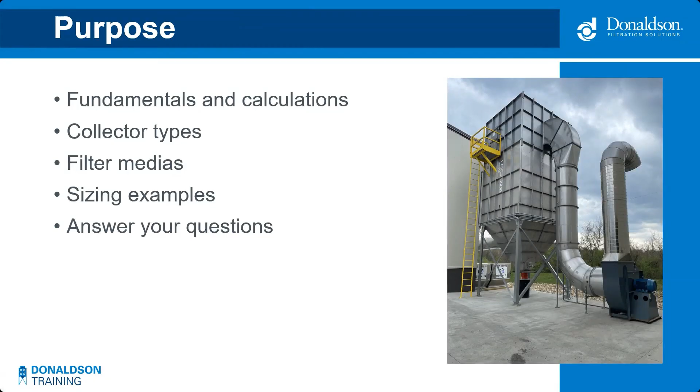We're going to start off today's webinar discussing the basics of dust collection, including fundamentals and calculations that pertain to collectors. Then we'll get into different types of collectors, filter medias, including the criteria and some sizing examples. And then we'll finish up at the end with everyone's favorite part, the Q&A session.

So let's start with the basics for those of you who are new to dust collection system design. I want to start off with why dust, fume, and mist control is important. There are a lot of reasons to control dust, fume, and mist, including safety concerns and hazards, improving air quality for workers, exposure control. We want to reduce potential dust in the breathing zones of the workers operating the process. Environmental concerns, we want to meet EPA standards for environmental air quality and outlet emissions regulations. And lastly, cleanliness. We want to address concerns about the overall cleanliness of the facility. At the end of the day, it's about sending workers home safe to their families.

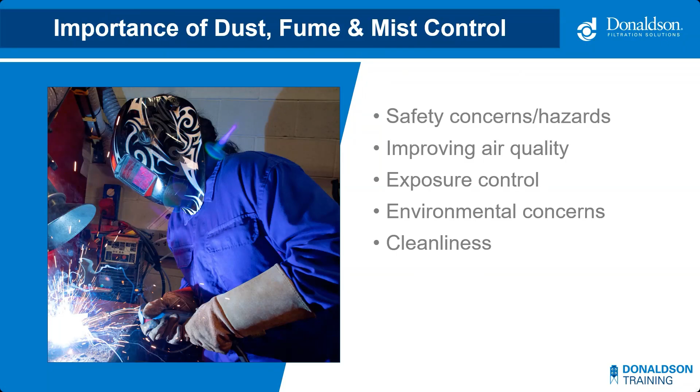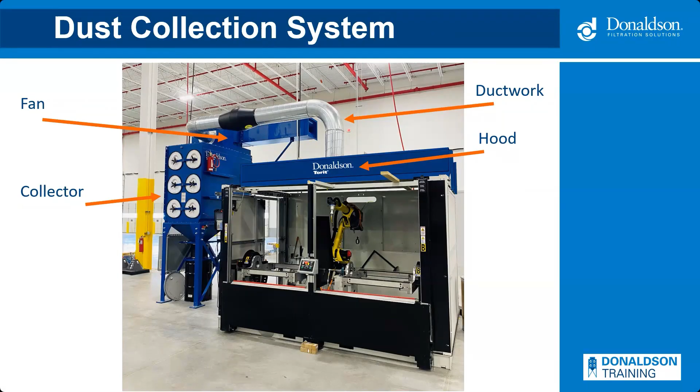Your typical four major components to a dust collector system are the hood, ductwork, collector, and fan. If one component in a dust collection system is poorly designed, the whole system is affected. So when experts like Nate design a system, there are a lot of factors that are taken into consideration.

I'll let him walk you through them.

Yeah, thanks, Alex. Here are just a few things we would consider. Of course, the material being collected is probably number one. We would certainly look at total airflow requirements. Are we looking at ambient versus source? Do you have any future expansion? These are just a few of the application details we would look at, leading into the applications engineering team as we look at particulars for each of your projects.

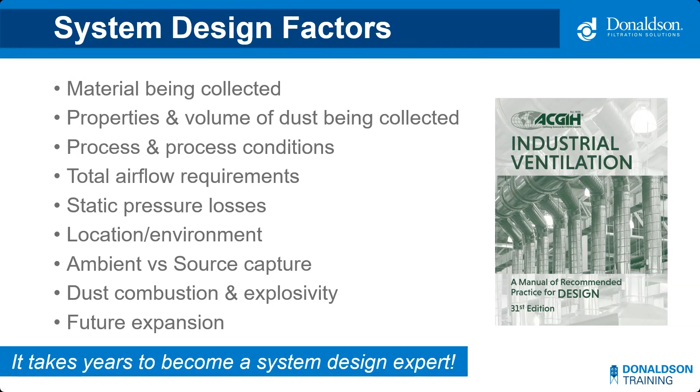Thanks, Nate. When we think about collecting dust, fume, or mist contaminants, there are some important characteristics to consider, which help us determine the type of collector and filter media. In terms of size, some contaminant is visible to the naked eye, while other types are only visible using a scanning electron microscope. On the larger side are contaminants such as cement dust, fertilizer, coal dust, and milled flour. On the submicronic side are contaminants such as weld fume and carbon black. The size of the dust is important because it dictates how the dust cake will form on the filters in the collector.

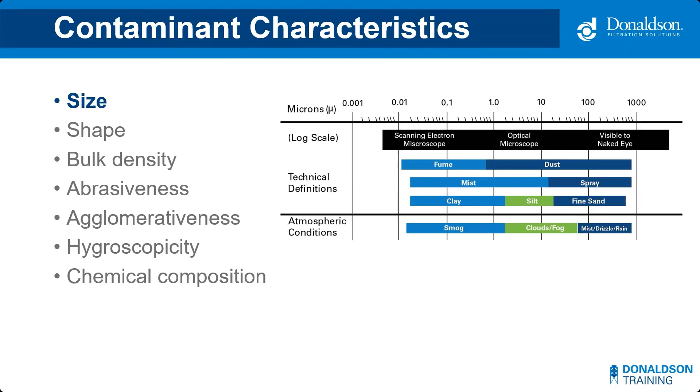Moving on to shape. The shape of the contaminant could be spherical or round, fibrous - think long and skinny like shredded paper - flaking or flat, or even a mixture of different shapes depending on the application generating that dust. The photo shows fibrous particles from a fiberglass sanding and grinding operation. In this situation, you would probably need to specify a particular type of filter media and potentially a specialized baghouse to keep the dust from bridging over the outlet and between the filters.

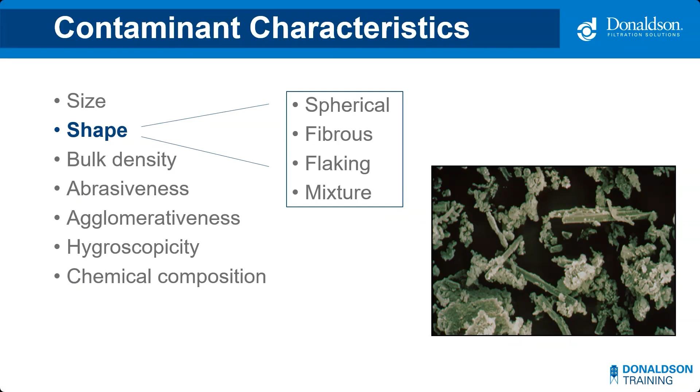Next, we have bulk density. Bulk density is the amount of weight measured in a defined volume. It is expressed in mass per unit volume, typically pounds per cubic foot or kilograms per cubic meter. An example of a lighter dust is oats at 26 pounds per cubic foot, and on the heavier side is lead carbonate, at about 250 pounds per cubic foot. Do you think the same amount of airflow will capture each dust effectively? Probably not. Bulk density will absolutely factor into your conveying velocity calculations when sizing a collector.

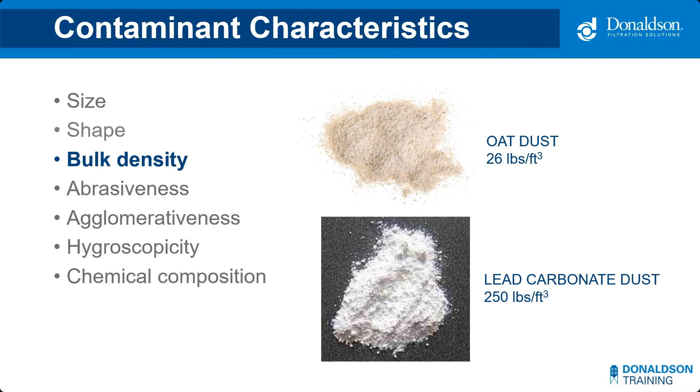Next up is abrasiveness. Abrasive dust will abrade filters and the structure of the dust collector itself. Examples of abrasive applications are sand drying, metal processing like copper slag, and other types of mineral processing. It's an important design consideration.

Nate, what would you do to minimize abrasion inside of a collector? It's a great question. The first thing we want to manage is the velocities. We want to be thinking about how we're managing the dust as it's entering the collector. There are a couple of strategies we can incorporate to help manage that, whether we're looking at an extended dirty air plenum, or maybe an AR style inlet. But again, that's the key when trying to manage abrasiveness - how do we manage the velocities and effectively manage that material going into the collector?

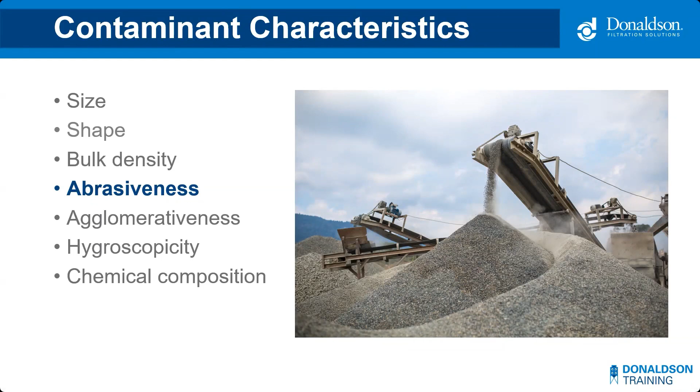Thanks, Nate. Another characteristic is agglomerativeness. This is the characteristic that will tend to gather dust into a ball, mass, or cluster. Examples of agglomerative dust are paper, cellulose, and cotton. Think of it as dust bunnies or tumbleweeds. Special cartridge design or potentially a specialty baghouse may be needed if the dust is agglomerative.

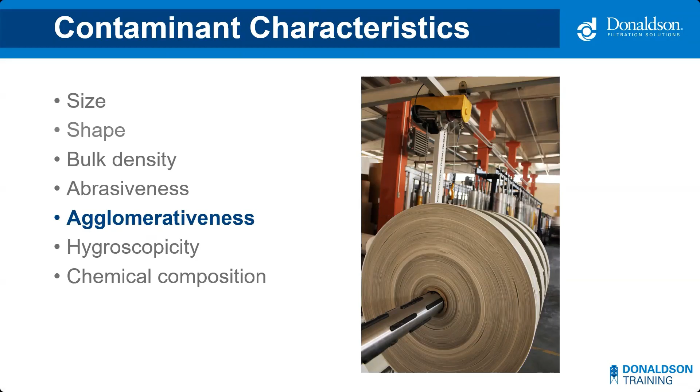Next on our list is hygroscopicity. This is the dust characteristic that will readily take up and retain moisture. Hygroscopic dust examples include acids, starches, and cement. Think very dry dusts that want to absorb moisture if present. You want to keep them dry and free from moisture ingress or even humidity. Selecting the right collector and filters is important for dust that retains moisture, since there's a potential to plug up the filter media.

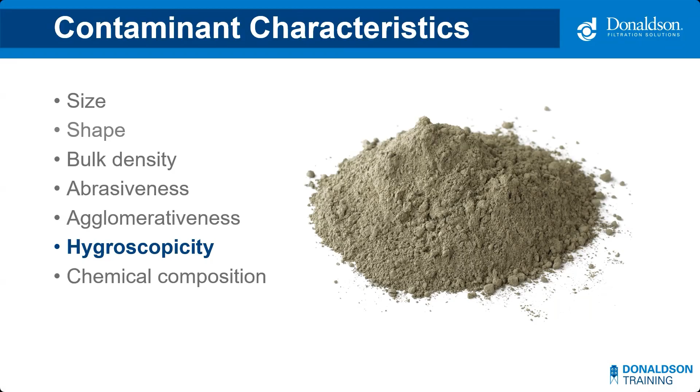One of the last contaminant characteristics we will review is chemical composition. This is very important to consider. It's always good practice to get the safety data sheet on the dust from the customer. This will provide information regarding corrosiveness, toxicity, and explosiveness. These factors may affect the collector or filter media type, material of construction, and recommended accessories such as bag-in, bag-out options, and explosion suppression devices.

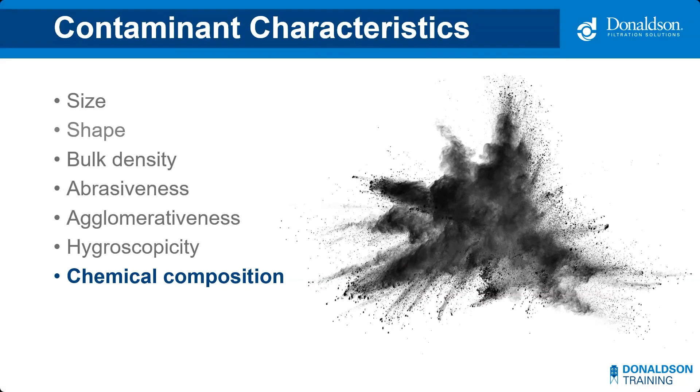The last characteristic we will discuss is combustible dust. I'll pass it over to Nate for more details, as this is a large topic. Yeah, this is a large topic. We could probably spend, if not a day, maybe even a week, exploring the various aspects of this subject. But we'll just take a quick snapshot so you understand that this exists and is something you're going to have to address.

Here on the left, I think a lot of us are familiar with this fire triangle. What do you need for a fire? You need a combustible dust, an oxidizer, and an ignition source. If we move one step to the right, we can see this flash fire square, which basically adds one more element: the dispersion of the dust. So much like fire, we'll have a combustion event, but to get this flash fire, you need that dispersion of dust.

And then finally here on the right, we have the pentagon, which adds the aspect of containment or confinement of the dust. With each one of these, you need to be thinking about how you're going to effectively manage this risk. What are the potential solutions here, and how are we going to do this?

One thing I'll suggest is that as you're stepping through this, especially with the explosion risk, when we're looking at this with the dust collection system, end users are going to have their dust tested. Most specifically, we're looking for KST and PMAX. There are a few other values too, like in the standard dust test, such as MIE, and some other features. But KST and PMAX are the ones we'd be looking at to help size and select explosion protection equipment.

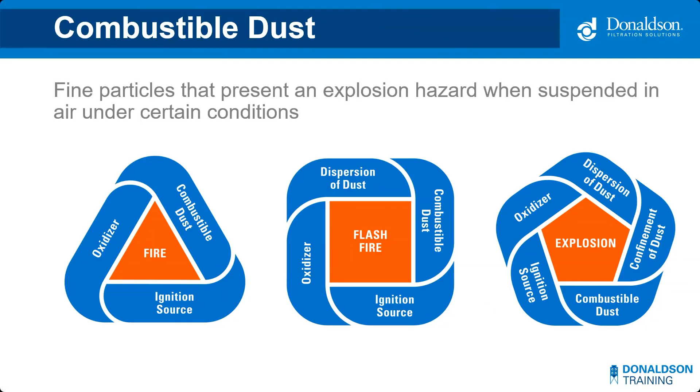Now here's a few other terms. I'm sure some of you are familiar with them, but we'll just brief over it. First, airflow, usually denoted as Q, is the volume of air flowing through the system. Here in the States, we see this as CFM, or cubic feet per minute.

The second term here is velocity, denoted by V, measuring the linear speed of the object — in this case, usually the air and dust — measured in feet per minute. Then there's area, typically of the ductwork, sometimes filter area, denoted as A, measured in square feet. If we look at the airflow calculations, Q equals V times A, and based on the unit evaluation, you can see how cubic feet per minute equals feet per minute times feet squared.

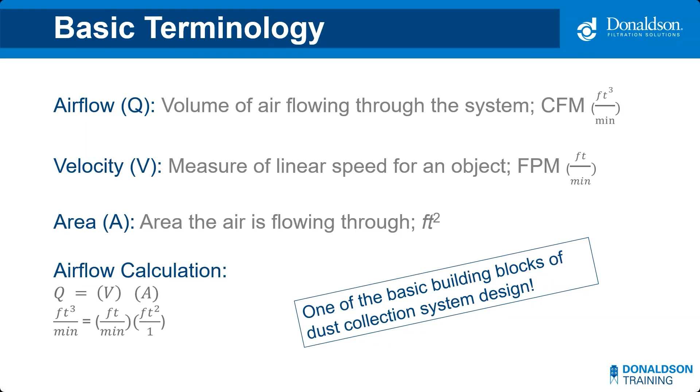This plays into the next concept, air-to-media ratio, or AMR. This is a basic way to understand how aggressively or conservatively sized a collector is. It started in the baghouse industry, where we look at the total airflow, Q, in cubic feet per minute, and the total area of the bag, to essentially get a face velocity. If you think back to the previous slide, as you bring these two together you get a face velocity, but we reduce it down to a ratio. So we can easily say something like 6-to-1 is pretty conservative, or it's pretty aggressive, based on the application details.

Can velocity usually refers to, or we're mostly concerned about this aspect when talking about a baghouse with a low entry point. You want to think about, if air is coming in low and going up towards the bags or filters, that air is driving the dust upwards. Depending on things like its shape and density, we might resolve that into an aerodynamic diameter, as I've heard it described before. But essentially, can velocity can play a factor in how well a dust collector works.

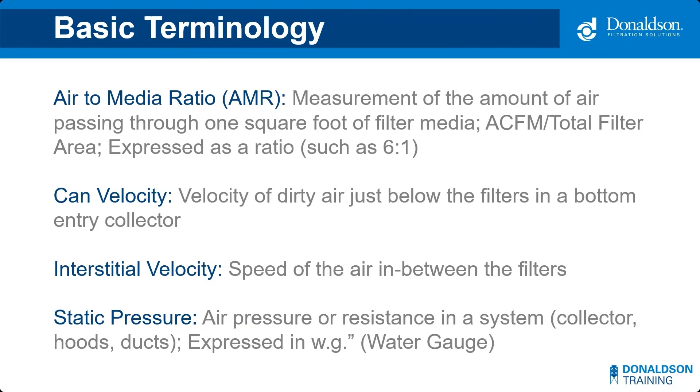So a grain, this is a very small unit of mass. Essentially, it's 1/7,000th of a pound, and very common in munitions. When you're thinking about gunpowder, that's how they typically will measure the munitions there. But it gives you an idea, okay, here's the mass.

So this is how we're describing the mass of the stuff that we're collecting at the hood. And this helps us then in the next piece, this grain loading. How much stuff is in the air? What's the dust concentration, or what's that mass concentration within the air? And this helps us understand how conservative or how aggressive this application might be.

Something with a grain loading of, say, like 0.1 grains per dry standard cubic foot, that's pretty easy. When we start talking about things that are like 2 or 3 grains, we're getting quite a bit more material, and we probably need to start thinking about not only how is that going to affect the filters and the filter life, but then how are we going to manage that material throughput.

Do we need to consider things like pneumatic convey? Do we need to consider things like maybe a trough hopper with a screw? So it kind of helps us to widen our scope and better understand the application.

The filter media, of course, very important. We want to think about how that dust is going to interact with that filter media. Say if it's an oily type of dust, maybe it's a grain, maybe we look at an oleophobic treatment. If it's fibrous and we're looking at a cartridge, maybe we want to open those pleat spaces up so that those fibrous materials don't get plugged within the pleat.

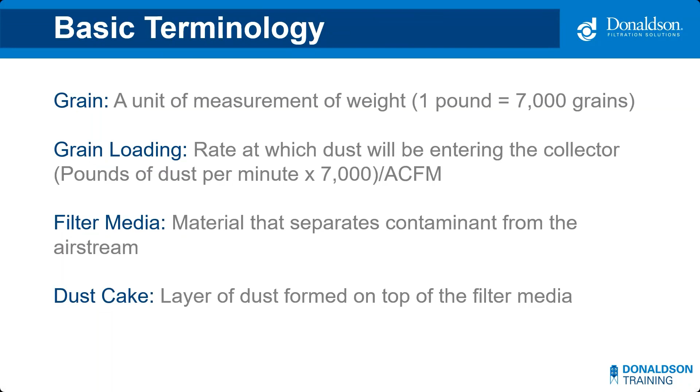So let's start with the collectors. Let's start with the overall dust collection systems and kind of the main two types. Let's talk about our objectives. We're delivering sufficient efficiency while operating in a predictable, stable, and economic fashion.

We want to know how the dust collector is going to work. We want to make sure that the end user is able to account for that and that they can plan for that. They don't want to have these upset conditions where they have maybe additional costs, or maybe it's not sized correctly and they're having issues with pickup.

And some common mistakes with that are, first and foremost, poor assumptions about the application. We didn't understand the dust, maybe didn't understand the total system correctly, and that can lead to problems down the road. Certainly wrong filtration technology. If we have a dust that is, say, oily, and we put an oleophilic filter on there, well, that's going to blind off pretty quickly. So we want to make sure we're really understanding the filtration mechanisms, the dust types, and picking the right filter.

If a collector is incorrectly sized, it's a tough place to be. You don't have many options. So we want to make sure that we're sizing it correctly right up front.

And of course, the dust collector sometimes, many times, gets blamed for all of the problems, but it could be a poor installation as well. There could be some other system effects upstream or downstream that could be causing overall system issues. So we want to have this kind of broad scope from hood all the way to fan outlet, making sure we understand what those parameters are so we can have a very well run system for the customer.

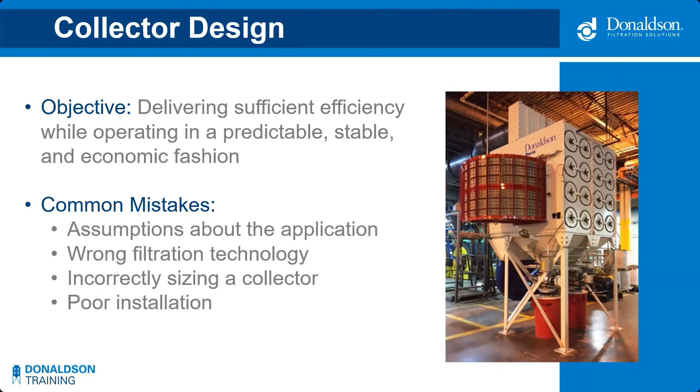And now here, this is what I was meaning to get to, the two different types. Cartridge collectors on the left, bag houses on the right. These are kind of the main two. We'll get into a few other specialty types as well for certain applications, but let's start with these.

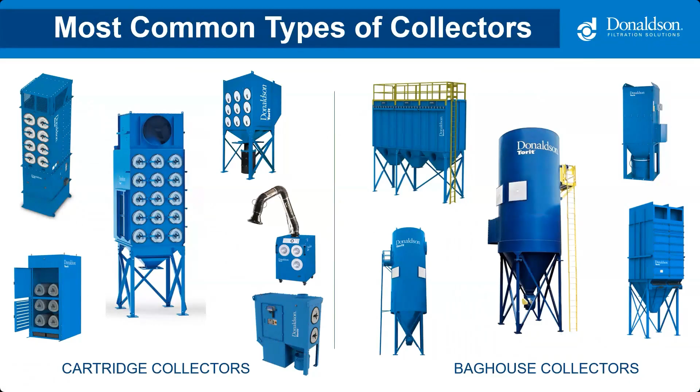So the cartridge collector, introduced by Donaldson in the 1970s, is certainly a lot smaller than a bag house, and provides some inherent value just in that, certainly lower cost initially. It's also quite a bit easier to do a filter change out. I've done both, and I can tell you I would much rather do a cartridge than a bag. The bags are dirty, take a long time, relatively speaking, and certainly cartridge provides some great value.

Although there are some things that maybe would prevent us from getting into a cartridge, and we'll talk about that. But this is best for uniform dust, dry and free flowing, and that's kind of the main thing that was pounded into my head when I was on the applications team: what's the dust? Is it dry and free flowing? Does it seem to act appropriately? Then a cartridge is probably a good place to start. That's our first thought in the hierarchy of making a decision. Some markets: fabricated metals, food processing, depends on what the food is, pharmaceuticals, minerals, and a whole host of others.

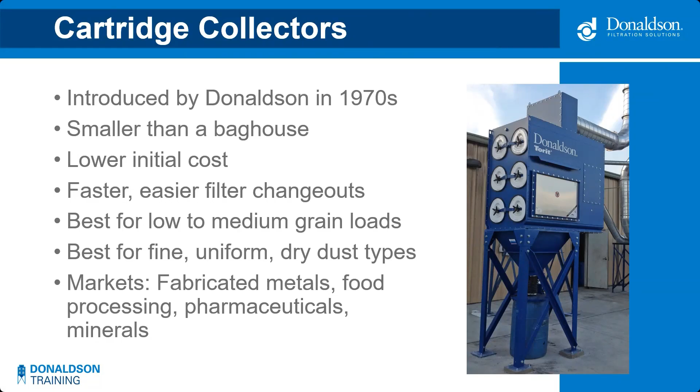So here's a couple of examples. On the left, we have laser cutting, and it's pretty simple. Can't see the hood, but the hood is in the building. It has ductwork that comes into the inlet, into the collector, and then just out the fan. Doesn't appear to have any kind of explosion protection on it. And it's really kind of a simple, very elegant solution.

On the right, we have powdered tea leaves, and you can see this large mass on the left side of the collector. That's a flameless vent. That is essentially an explosion vent, which is also covered by this stainless steel wire mesh. And that wire mesh helps to knock out the flame front. It will not knock out the pressure wave. It helps to relieve the pressure, but it will knock out the flame front and provides us an opportunity to put a collector inside when you may not otherwise be able to do that.

There's kind of two solutions for that. Skipping ahead a little bit, but there's the flameless vent, and then there's also a suppression system. Essentially, the suppression system is a sodium bicarbonate filled bottle, and then it'll discharge into the collector to snuff out a combustion event. But those are kind of the two we look at when you're going inside with a combustible dust.

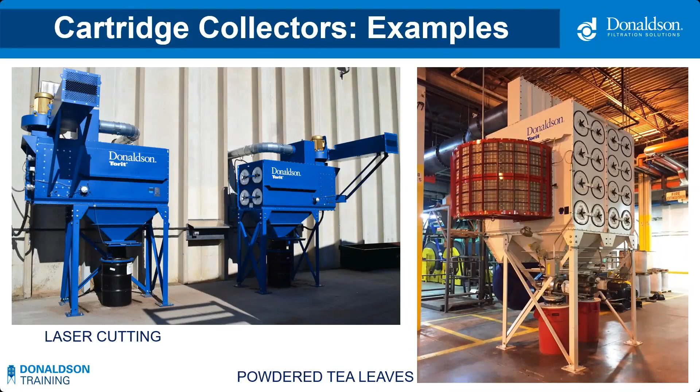Here again, plasma cutting, another thermally generated dust. Very common to see the cartridge on this. You can see the dust collector in the background. And then on the right, a metal grinding booth. Right here we see the booth, and you can't immediately see the collectors, but in the back there are four sections of louvers, and that's the bottom of our DWST. So that is a kind of point-of-use collector, great for booths. Just provides some flexibility as well. So it's not always that traditional cartridge that you're thinking of. We can incorporate this into some other spaces too, if the need would present itself.

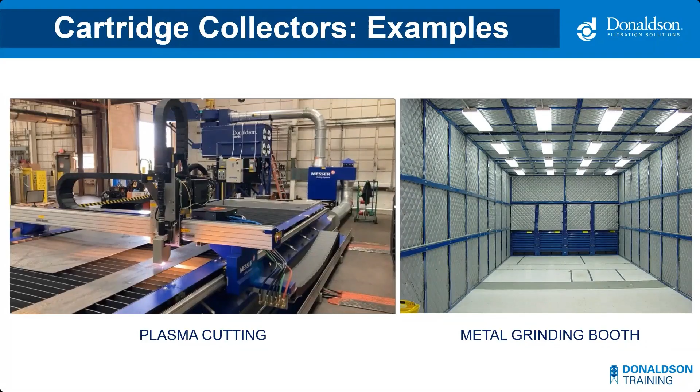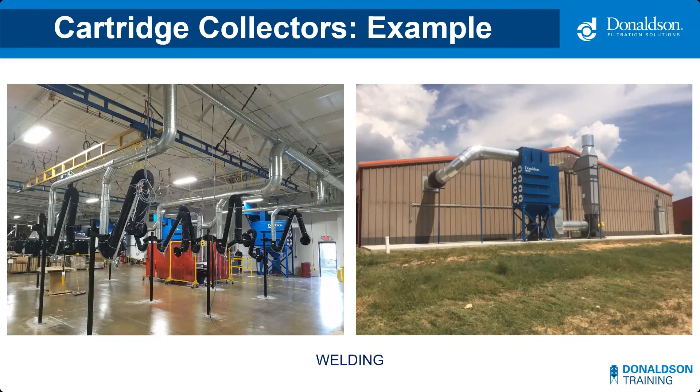And I'll pass it back to Alex to talk about particulars on filters. All right, thanks, Nate. Yeah, it might be obvious, but cartridge collectors use cartridge filters. They come in a variety of sizes and shapes depending on the type or style of the collector. There are a variety of cartridge filter medias available, and I'll share some details on why you would choose one versus the other.

So first off, I want to cover one important filtration concept with you. A famous phrase around here is that dust filters dust. As a dust cake builds up on the filter, it increases the efficiency of the filter, meaning it captures finer dust once that dust cake is built up.

Filters within a dust collector are going to get dirty and get dirty quick. Not all filters create a dust cake in the same manner. Ideally, select a filter with surface loading technology. This will increase your filter's lifespan, allow you to use less energy in the form of compressed air and horsepower of your fan, and reduce your overall emissions.

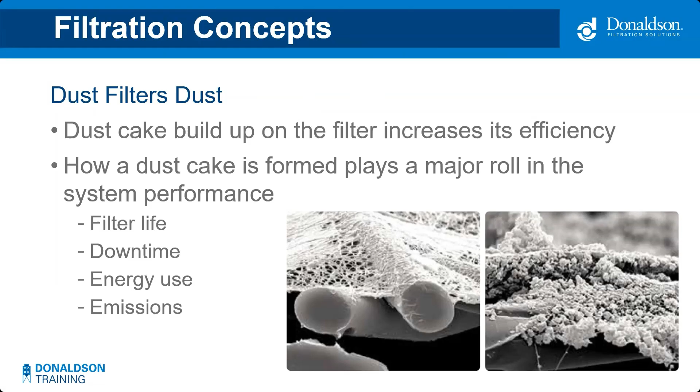So if you look at the photos in the bottom right, you can see the SEM image of a clean surface loading filter next to a dirty one. It's that nanofiber layer on top of a media substrate that holds the dust on the surface of the filter.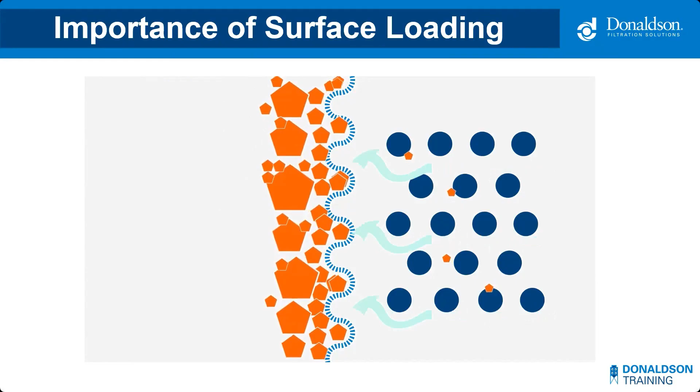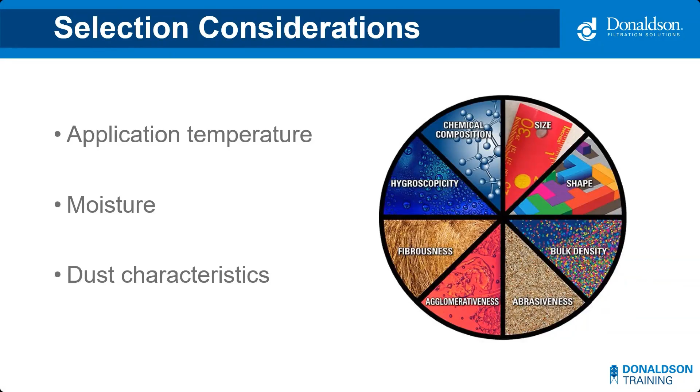So there are a lot of things to factor in when selecting a filter for a cartridge dust collector. To name a few include temperature of the application, moisture, and all of the dust characteristics we reviewed. Really, you want to think about the dust and how it will interact with the surface of the filter. It has to have the ability to capture the dust and be pulse cleaned while in operation. It also has to be able to hold up to the temperature and any chemistry within the process.

So I'll explain a few different types of cartridge filter media options. First up is Ultra-Web. This is our trademark nanofiber media I mentioned before. The nanofibers are laid on top of a cellulose or paper media, similar to what your car air filter would use. An overwhelming majority of installed cartridge collectors use Ultra-Web. Works great on light, dry, free-flowing dust. It can also handle submicron dust like weld fume.

Other applications for Ultra-Web are pharmaceutical powders, carbon black, and thermal spray. The next media I'll review is Torit-Tex. Instead of a cellulose-based media, it uses spunbond polyester. This is a fancy way of saying plastic. What makes this special is an expanded PTFE membrane that is laminated to the surface. This provides a smooth, slick surface that can repel water and hold up to chemicals. Torit-Tex is also very efficient, meaning it can capture very fine dust. Overall, think of it like the Gore-Tex in your rain jacket, or it makes a cooking pan non-stick. It's commonly used in chemical processing, food applications, and for paint pigment manufacturing.

The final one I'll review is our high temperature media. This is made of aramid fibers, a silicone gasket, and silicone glue that can withstand very high temperatures up to 350 degrees. Its performance is in the name. This is used in processes that create heat like process dryers, kilns, and coal combustion. So these are just a few examples of cartridge medias that are available. There are a variety of others available to meet the needs of a given application. We have a lot of resources available online, as well as a team that can help you select the right one for your application. Shifting gears, Nate will be reviewing baghouse collectors next.

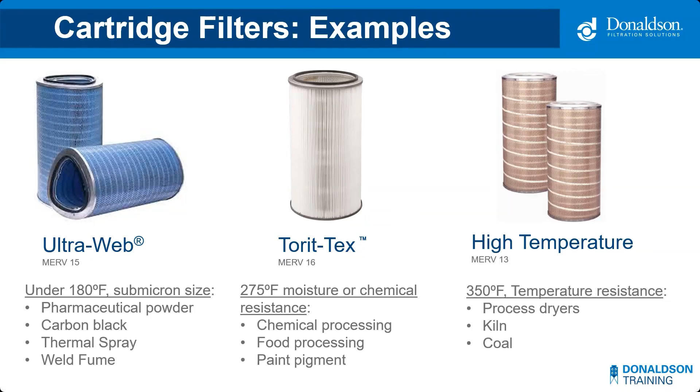And this is really mostly in part because of the mechanical action that you can get out of a bag as opposed to a cartridge. When you send that pulse of air into a bag, it expands and it has this bit of a snap action. And that is actually what's very helpful in these more challenging applications. You don't really get a lot of mechanical action in a cartridge.

These baghouses are certainly larger in size, although we do have some smaller ones. They are more labor-intensive filter changeouts in traditional bags. I'll let Alex talk a little bit more about some alternatives here coming up. But most of the markets that we serve here are like woodworking, grain, cement, sand, paper, food even, right? We talked about maybe salts and sugars and whatnot. So certainly a great workhorse within the industry.

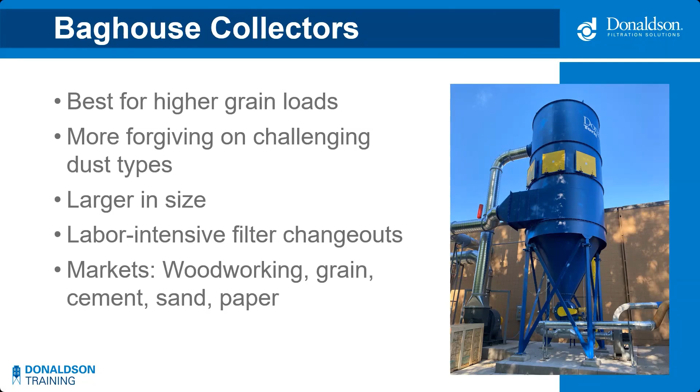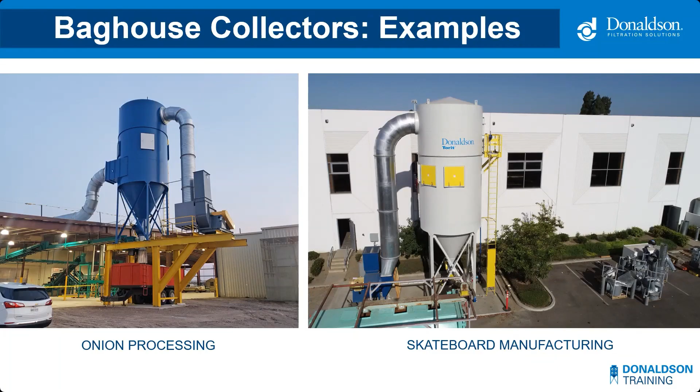Certainly onion processing isn't something I normally think of when I think of dust collection, but there it is. The other one, skateboard manufacturing, something maybe more traditional, right? Probably more woodworking. Also has explosion vents on it. Again, this shows a bit of the variety of where these bag houses can serve.

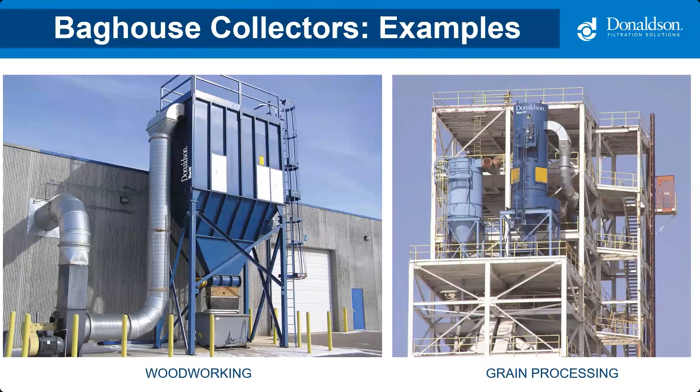And back to Alex to talk particulars on bag house or bags for bag houses.

All right, so bag house collectors use bag filters. The two main types are fabric bags and pleated bags. Fabric bags are installed over metal cages. During filter changeouts, the entire bag and cage are removed from the collector. The used fabric bag is removed from the cage and the new one installed in its place, then goes back into the collector - imagine having to do that a few hundred times. Messy, dirty, cumbersome process, right?

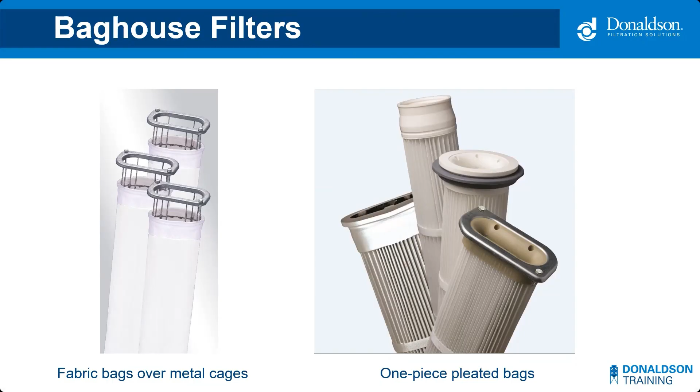On the other hand, we've got pleated bags. They're a one-piece design that eliminates the need for a cage and a bag. They tend to be shorter in length and take significantly less time to change out. Because the media is pleated like a cartridge, they offer 2 to 4 times the filter media as well. Not all bag houses can use pleated bags, but they are a problem solver for troublesome applications, such as those with abrasive dust.

So when selecting the proper media for a bag house, it's very similar to that of a cartridge. The applications and dust characteristics will be different, but you still need to answer the same questions: How will the dust interact with the media? How will the dust interact with itself? There are media types available to tackle challenging dusts if all of these factors are considered in the selection process.

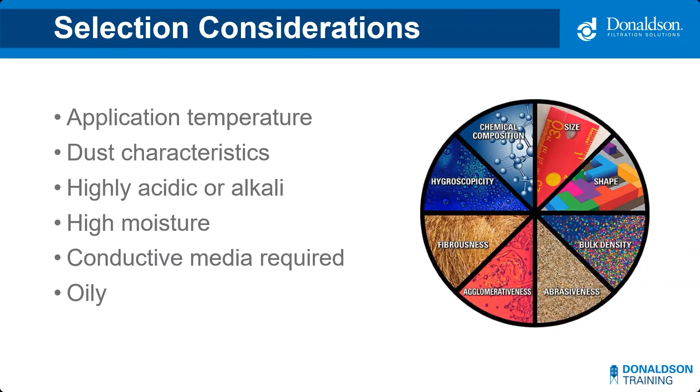So the first bag filter media I'll review is Dura-Life polyester. This is a go-to media option for a majority of baghouse applications, designed for dry, non-abrasive dust. Works great on grain dust, fine wood dust, and flour. This is the first media to consider when designing a system. If the dust is more challenging, you'll want to look at some other options.

The next one I'll review is Dura-Life oleophobic. This is our standard Dura-Life polyester that has been treated to repel oils and moisture. It can handle wet, oily, and sticky dust that would plug a standard media. A few applications you'll see this on are nut processing, oils, or any process with oils or hydrocarbons in it, or soap.

The final bag I'll review is Aramid. This media is identifiable by its yellow hue. Aramid fibers are also used in firefighting gear to protect firefighters from fire or heat. It's useful as a media for filter bags as it can handle high temperatures up to 425 degrees Fahrenheit. A few examples of those applications are cement, asphalt, and steel.

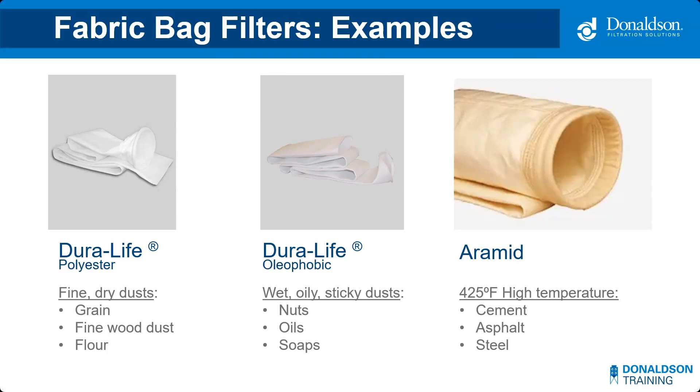This is just a sample of common medias for baghouse style collectors. There are a whole host of other media options that will depend on what the application demands. Again, we offer resources online or via the phone that can assist you in selecting the right one.

So I mentioned these earlier, but pleated bags are the other filter option for a baghouse dust collector. If you're looking to avoid common baghouse issues before they start, pleated bags are the way to do it. They'll replace standard fabric bags and cages in your baghouse with no modifications.

The benefits of pleated bags are that when applied right, you'll eliminate filter abrasion, like in abrasive applications, say like sand drying. They will lower emissions. Who doesn't like cleaner air?

I mentioned they add filter media to the collector, typically 2 to 4 times, it all depends on the situation. But that added filter media will provide longer filter life, meaning fewer filter changeouts and less production downtime. Not only will they need to be changed less often, but they take less time to change them out as well.

Lastly, you can turn the system's pulse pressure down when using pleated bags. This provides energy savings in the form of reduced compressed air usage, generally about 30%. So if you want to optimize the performance of a baghouse, pleated bags are a great option.

So now that we've covered baghouse filters, Nate is going to review some specialty collectors with you.

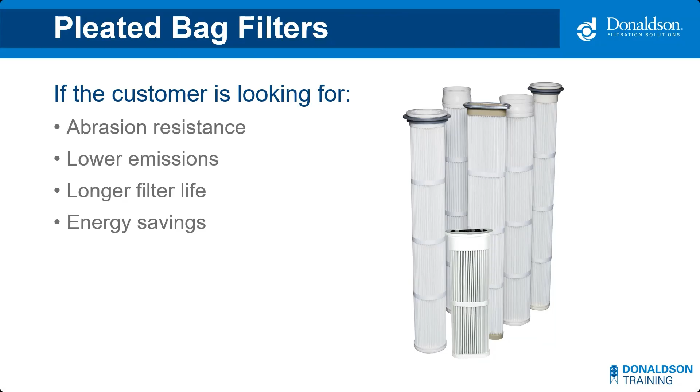Yeah, so here's another collector that we can consider. So sometimes you have applications where maybe it's really hard to get a hood or a ductwork piece into a particular location. Each one of these red arrows is showing the location of Donaldson CPV. So you can see that these are really point of use collectors, right?

So it's taking the dust off of that particular location and then actually putting it back into the system right there. There's no hopper on this collector. It's just collecting and then reintroducing that dust.

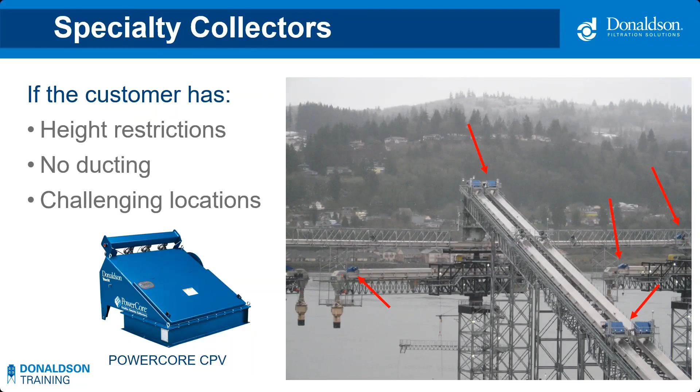And certainly you can see the advantage and the value in having this kind of point of use collector. I mean, think about having to run ductwork from each one of these locations on this articulating structure, and figuring out how to get that all to work well while sending it to a single dust collector. That certainly provides some particular challenges. Right here for these, all you need to do is run power and then compressed air, and then you can service particular locations. So certainly a great advantage to keep in mind when you have something kind of challenging.

And this other collector is actually a baghouse, but it's certainly under the specialty collectors category. This baghouse, as you can see from the animation, provides a significant amount of mechanical input to help manage dust cakes that are particularly challenging.

I'm always reminded of a story from Gabriel Safarian, one of the engineers at Donaldson, who was on site troubleshooting a collector. It was on sugar dust, and the bags got caked up with all this crystalline structure of the sugar. The pulse cleaning actually wasn't set up correctly, so the bags just got loaded up. After they had realized what the issue was, they corrected it and then sent it through a pulse cleaning sequence, and there were sheets of sugar coming down and crashing in the collector. They turned the fan back on and it worked great.

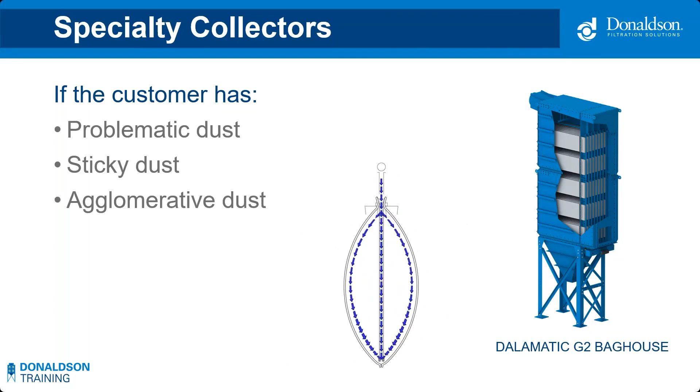So again, really a testament to this technology. But if you have a challenging application, whether it's crystalline or sticky or maybe particularly agglomerative, there's an option to consider in a baghouse for those particular applications.

And here's another specialty collector. We've talked very much about dry collection, but Donaldson also can address any mist collection needs that might be out there for a customer. The WSO particularly stands for water soluble and oil, and is a solution that you can apply, say, on CNC routers, when you have water soluble coolant on cutting or oil in a flood bath for cooling.

And then sometimes we even see thermally generated droplets, and these are usually that blue haze that you see. If you think about a car, it's burning oil and it's got this blue haze coming off the tailpipe—that is a thermally generated droplet, and that's what we can help address here as well. So if you have particular manufacturing processes that produce that type of droplet, then think about a WSO. That might be helpful.

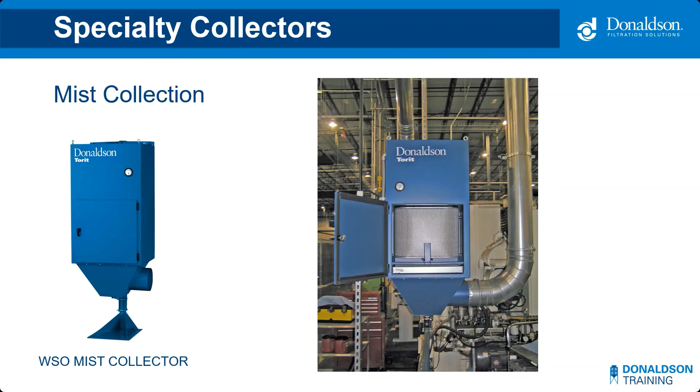And then also ambient collection. These are cartridges - this one on the left is the AT3000, a ceiling mounted type of unit. It helps produce what we call a racetrack within a certain area, usually in conjunction with other AT3000s set up within a space.

Really the name of the game on ambient collection is effective changeovers within the space. If you have an ambient system you're working on, it can be somewhat difficult, but try to get as many good changeovers within that space as possible for a very effective solution.

The other thing to consider is this DFA tower. Unlike the ceiling mounted unit, you could have a tower style, tall and skinny. These could be located within certain areas of a facility to help provide that overall dilution effect you're looking for. Ideally, you'd be setting up some recirculation zones and looking at that, but that's a wider conversation for another time.

Things to think about are what are some big obstructions within the space, what other cross flows could be happening - could it be coming from fans, or from fork truck traffic or doors opening? Those are the things I would consider when looking at that type of application.

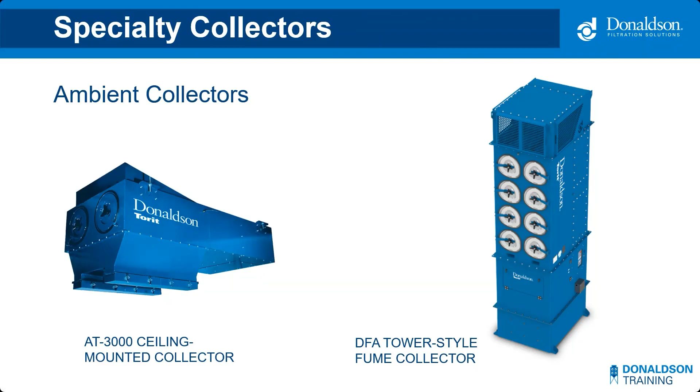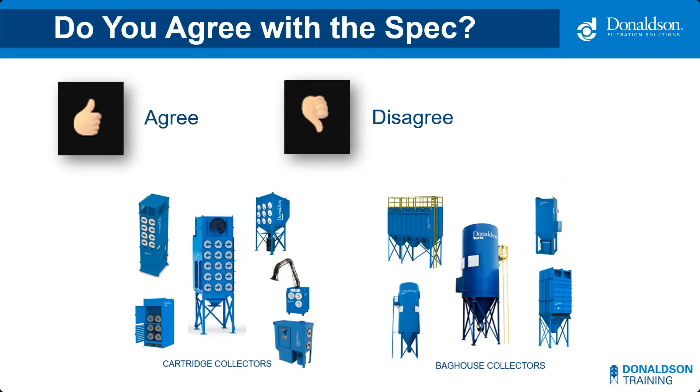All right, so we are going to go through a quick Q&A with you guys, a little bit of interaction. We are going to ask you to maybe agree or disagree with the spec that we're going to throw at you here.

So the first scenario is for an application with paint pigments - a mixing application. The dust is dry or submicronic, with maybe medium grain loading, and the airflow is around 10,000 CFM. So what do you think - agree or disagree, thumbs up, thumbs down? What do you think about a baghouse?

Looks like I'm seeing some agreement with the baghouse, some disagreement, but mostly agreement. Here are my thoughts: I don't think a baghouse is necessarily wrong, however I think a cartridge would probably be a better fit, only because these paint pigments are usually dry and free flowing. Unless you're getting into a specific material challenge, cartridges have proven fairly successful in this application. Not to say a baghouse wouldn't work - it certainly would - but I just think a cartridge is a slightly better solution for that application.

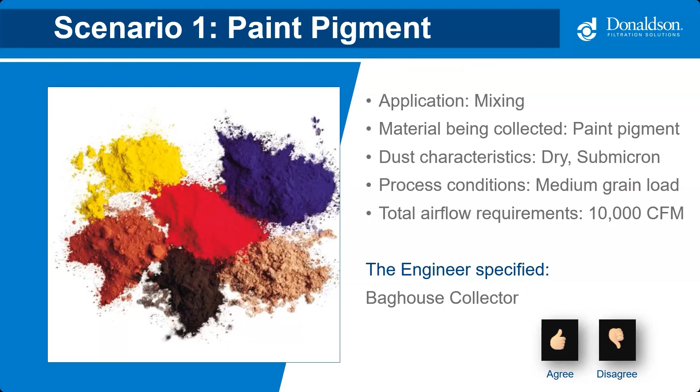All right, scenario number 2: a Banbury mixer, carbon black and additives. It's going to be oily and submicronic, again a medium grain loading, and we've got about 20,000 CFM. What do you guys think about a baghouse - do you agree or disagree?

Looks like I'm seeing mostly agree on this one. Yep, that's what I'm seeing too, and I would agree with that as well. I think a baghouse is the best first selection on something like this, particularly because of the oily issue. This dust is probably going to be a bit more challenging - we probably want that mechanical action from a bag to help address this need.

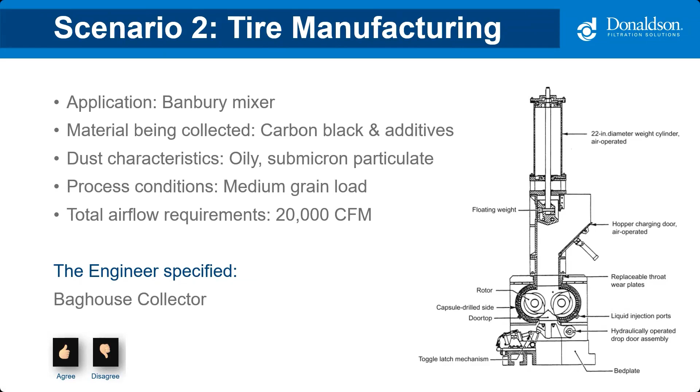All right, scenario number 3: a robotic welding cell. So we'll have a thermally generated metallic weld fume, submicronic, probably a light to medium grain loading, and about 8,000 CFM. What do you guys think about a cartridge?

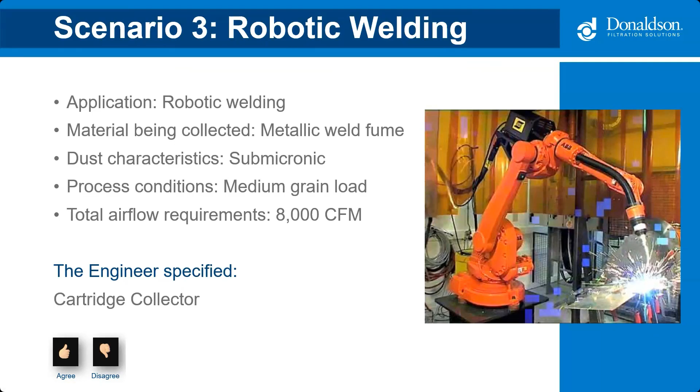Yeah, looks like we're agreeing with the cartridge. Yep, that's all I'm seeing - I think these guys are sharp, so I would totally agree with that as well. This is absolutely cartridge all the way, unless something crops up in other application details. This is absolutely a cartridge.

All right, scenario number 4: a coating application for sugar dust. The dust is described as agglomerative, also medium grain load, and the total airflow is about 7,000. What do you guys think about a cartridge?

So some disagreements with the cartridge. Yep, they're sharp - I can see they're sharp. Yeah, I would agree, I think a cartridge is not the correct selection here. I think a bag is certainly the first thing we would want to consider for this kind of sugar dust or any similar food applications. That's probably where we would start.

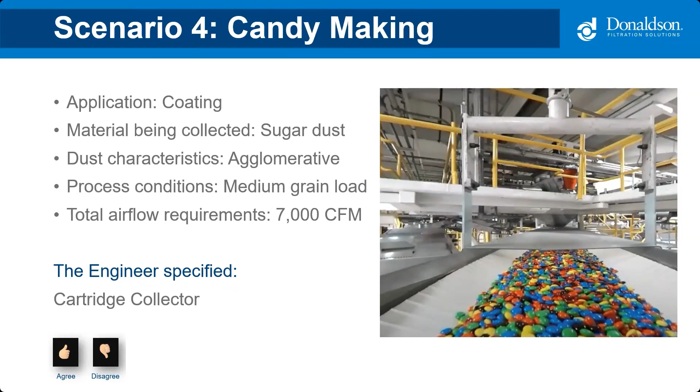And then how about scenario number 5: a truck pit or receiving pit for trucks, corn dust. The dust is dry and free flowing, again medium to higher grain loading, 12,000 CFM. What do you guys think about a baghouse?

Again, mixed reviews. I think we want to know a little bit more about the applications, so we probably need to ask some more questions. I would lean into baghouse on this one, but I'd want to ask more questions to better understand what we're going to be getting, how that might interact with the collector, and if we see any problems with the cartridge.

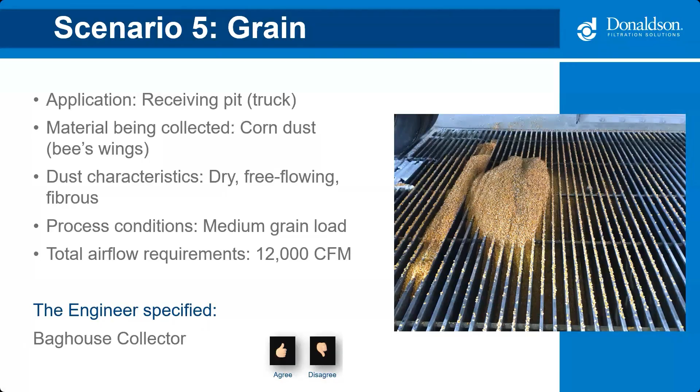All right, so we've talked about some general ideas, like which way do we go, bags or cartridges? Now we're going to get into more sizing, showing you how we would do this. Just simple examples—certainly we're here to help if you have particulars, but we'll jump into a couple of examples to show you how we'd approach it.

First and foremost, we want to be thinking about AMR. There are particular AMRs for each application, so we need to ask a bunch of questions, including how aggressively we want to size this. Donaldson certainly has AMR guidance. One thing I want to exemplify: particularly on the cartridge, we can have the same dust type—a thermally generated metallic fume—whether it comes from a fiber laser or ambient weld fume. It's essentially the same dust, but depending on how it's presented, we might tailor that AMR very differently.

A high-powered fiber laser is a fairly aggressive, fairly challenging application, so we'd want to be more conservative—closer to 1-to-1 on that high-powered laser. Versus say an ambient weld fume, there's a lot of dilution air within that capture, so we'd run that collector very aggressively, sizing it closer to 4-to-1. There are some other things we'd consider as well, but we would size that pretty aggressively.

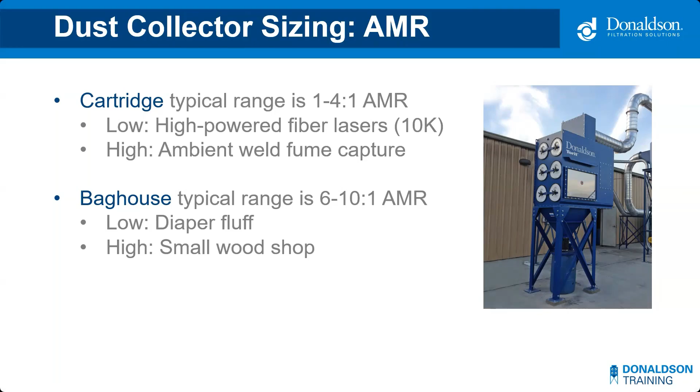Similarly with a baghouse, depending on the application—say a diaper fluff or super absorbent polymer—we would run that one very conservatively and do some particular things to the configuration. Whereas say a small wood shop that's not running 24/7, maybe like a high school, we'd run that probably more aggressively because the dust challenge just isn't there.

So things to consider: what happens if we're too conservative? What happens if we're too aggressive? Well, too conservative gets extended filter life. That's not necessarily a bad thing, but there are increased operational and equipment costs up front—higher capital spend right away.

When you're too aggressive, you can have shortened filter life. That's an ongoing cost. You'd have insufficient airflow, and we're maybe not even solving the reason we were brought in in the first place—to help solve their dust collection needs. If it's too aggressive and you don't have sufficient airflow, you can't get effective capture at the hoods, so there's additional operational costs, more interacting with the collector. You want to strike that balance—not too conservative, not too aggressive. That's exactly what these AMRs we're going to look at will help us with.

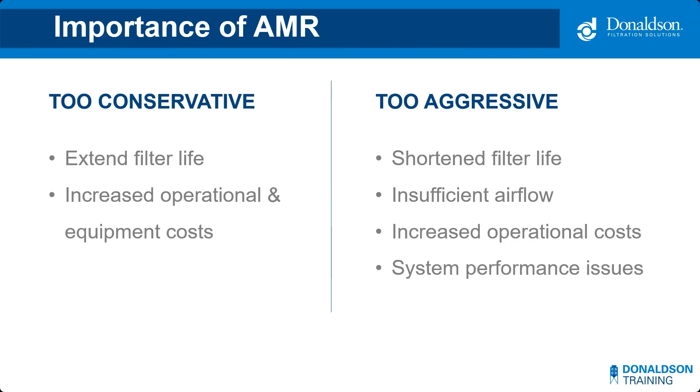So this first example: a fine dry dust from cutting and sanding. The grain loading is high, so we immediately know we're into a baghouse. 15,000 CFM, and the recommendation is about 8-to-1. To get there, we'd take 15,000, divide it by 8, and get about 1,900 square feet of media. Then we'd go to our chart to see which models of the Donaldson RS would provide that amount of media—somewhere between the 146 and the 156.

So how does that shake out? What does that mean for the customer? What does that mean for the application? How do we make sure we're asking the customer the right questions, like what's most important to you, and how can we best serve you with this selection? Those would be some of the things I would look at immediately.

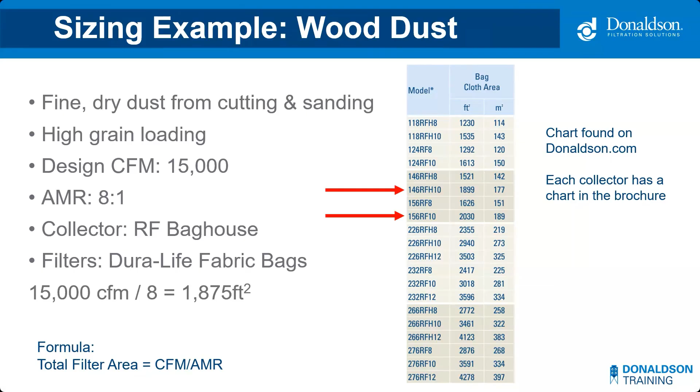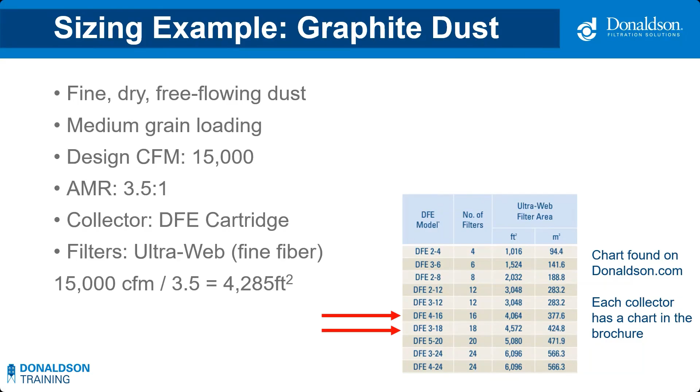Ultimately, we're here to help, right? So let us know what your questions are. Let us know how we can help you with particulars as you're interacting with end users and designing systems. You got a particular question like, hey, what do you think about this inlet configuration? Or this dust is agglomerative, or it's sticky, what do we think about that? Certainly, we've been doing this a long time. We've got a great team behind us in the applications and the product management team. So again, let us know how we can help. Let's start that conversation.